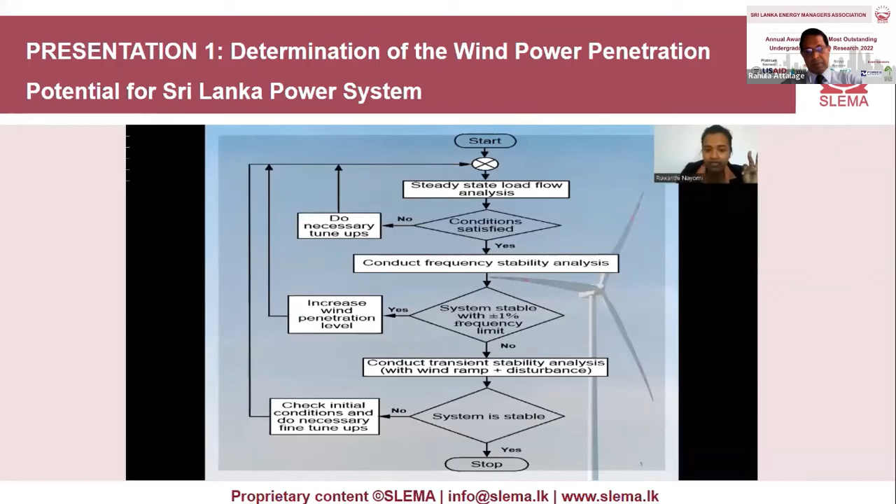And finally, establish wind power penetration potential for 2021 and 2025. This is my methodology. I have followed three analyses: load flow analysis, frequency stability analysis, and transient stability analysis. I have categorized my results in four parts. I will explain them one by one.

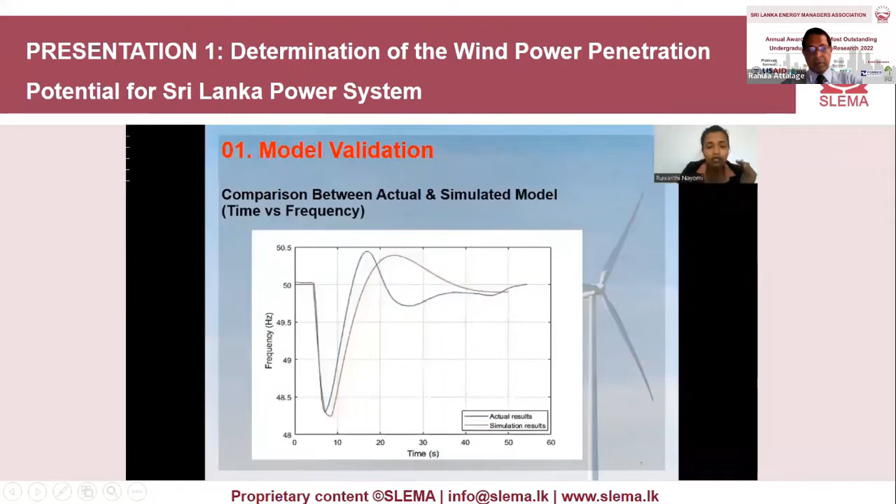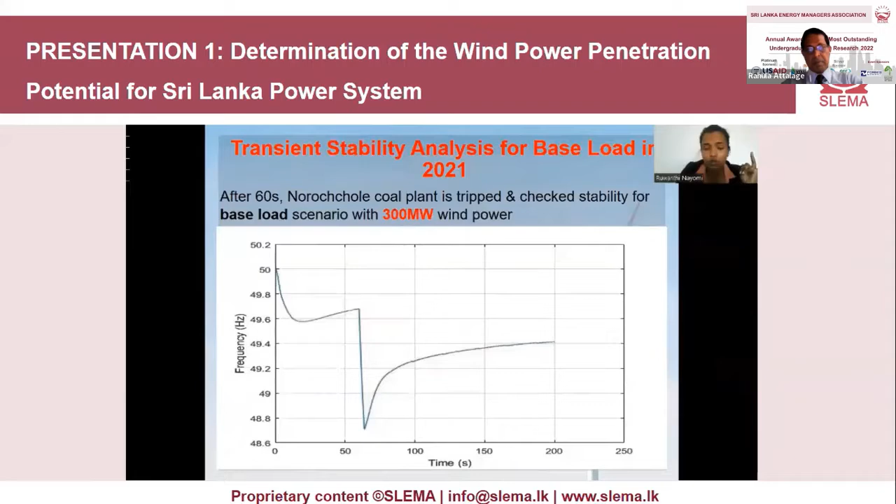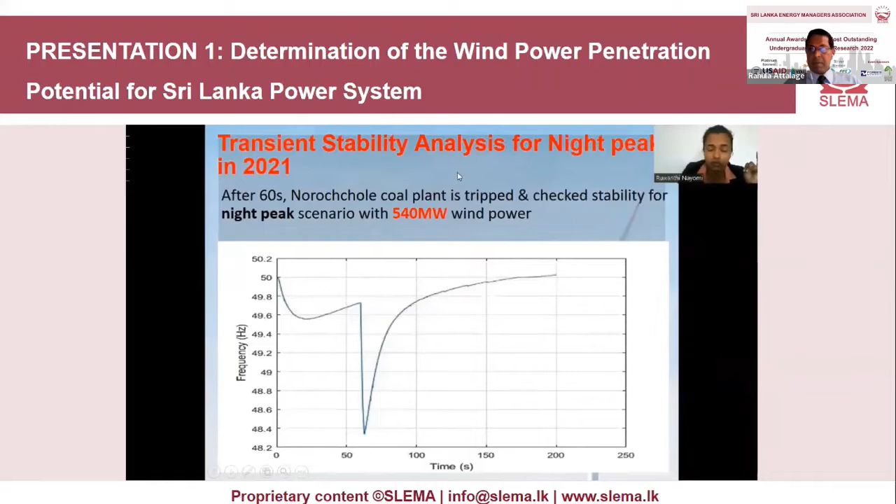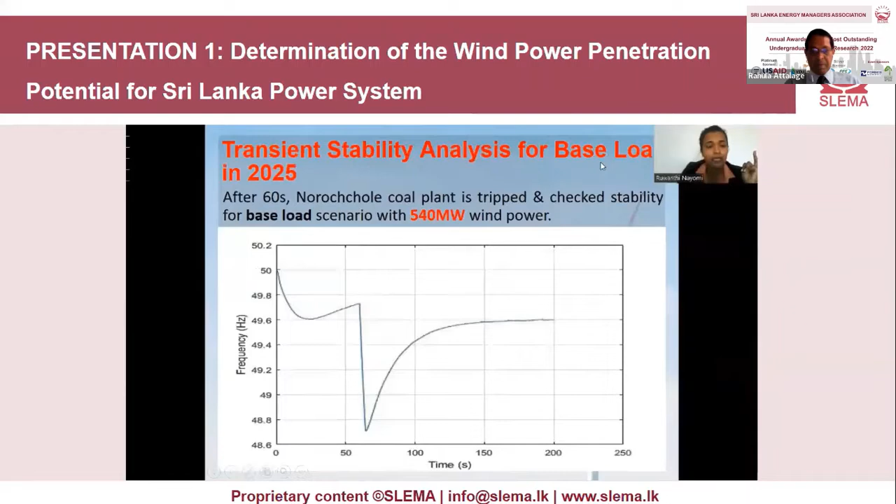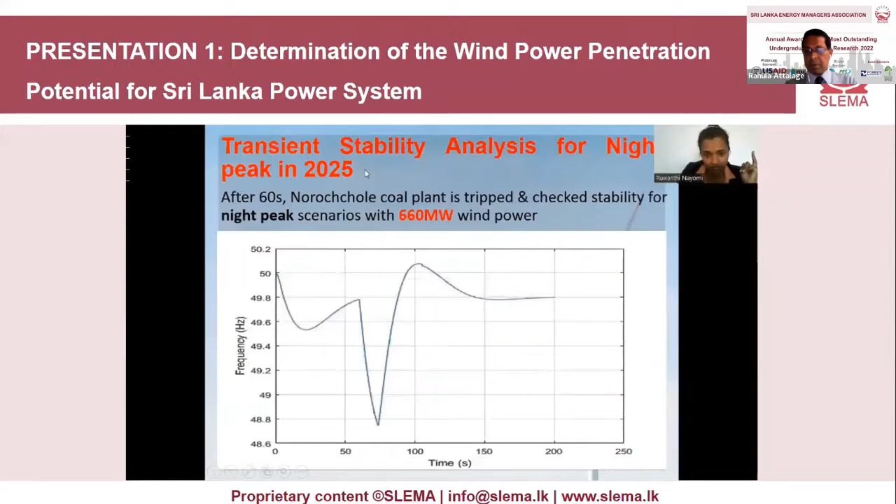Here, second column represents the wind absorption level as stated by Ceylon Electricity Board in long-term generation expansion planning. These are according to the CEB values. Last column represents the wind absorption level as stated by my research study. All the results are verified and confirmed by the transmission planning branch in Ceylon Electricity Board. So these results are 100% correct.

As an example, for 2021, CEB proposed wind level is 124 megawatt, but actually we can get 540 megawatt. See the difference, ladies and gentlemen. Now you can see the difference between the two values. So what's the meaning of this value? The meaning is we are wasting that much energy. We are wasting 416 megawatt of energy. Otherwise, we get this much energy from diesel or from coal.

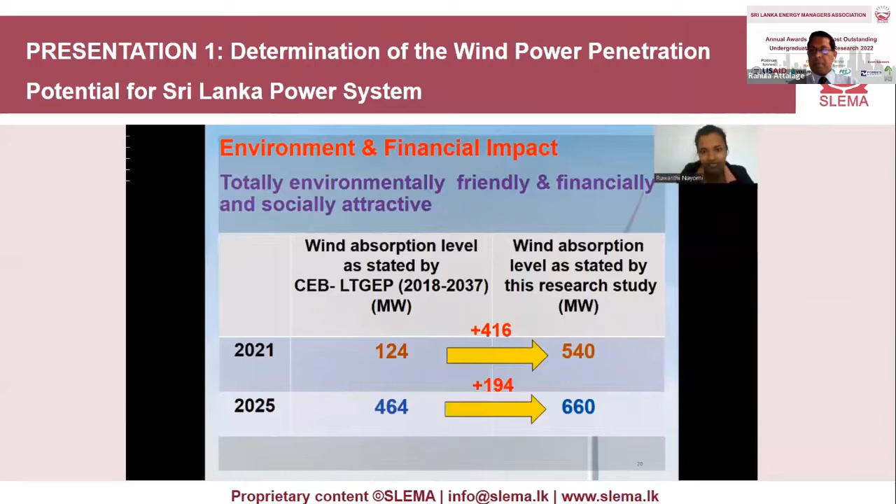So moving on to the device. We have introduced the Hull reservoir wave energy device, a floating type wave energy converter consisting of a flap and a hull moored to the seabed, and when the wave moves, due to the rocking motion, energy is generated.

This is a new hybrid concept. Sorry. This has been derived from a previous study, and there are modifications. We have replaced the pendulum with a flap, and we have also included the internal fluid in the hull.

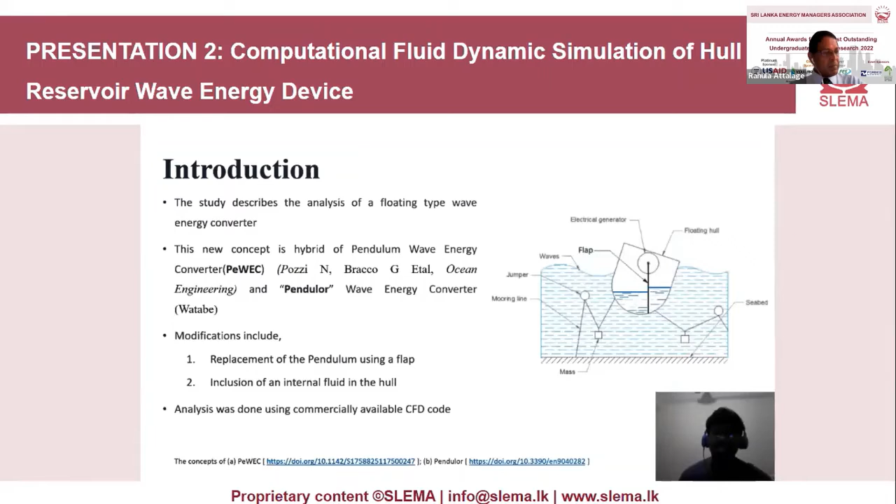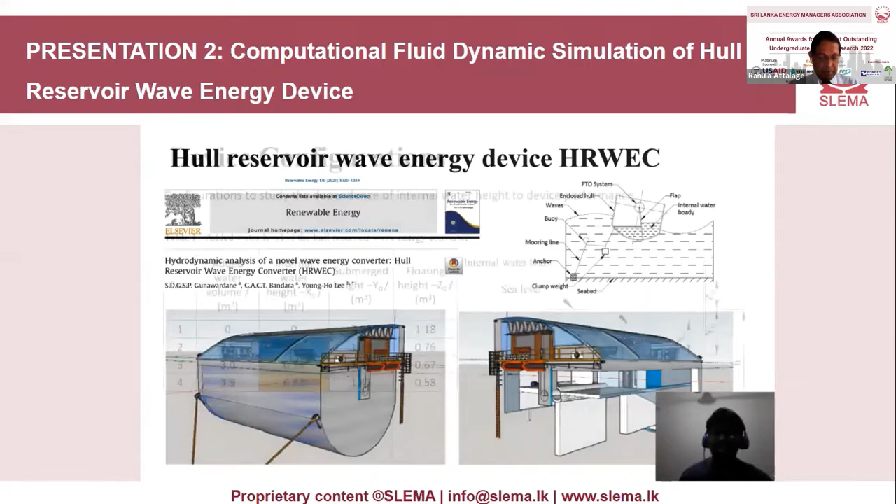The device was initially introduced in this research paper, and all the physics of this device have been discussed mainly in this paper, but in this paper the internal fluid of the hull hasn't been included. So we have studied this device under different configurations by changing the water level inside the hull. These are some arbitrary configurations that we came up with.

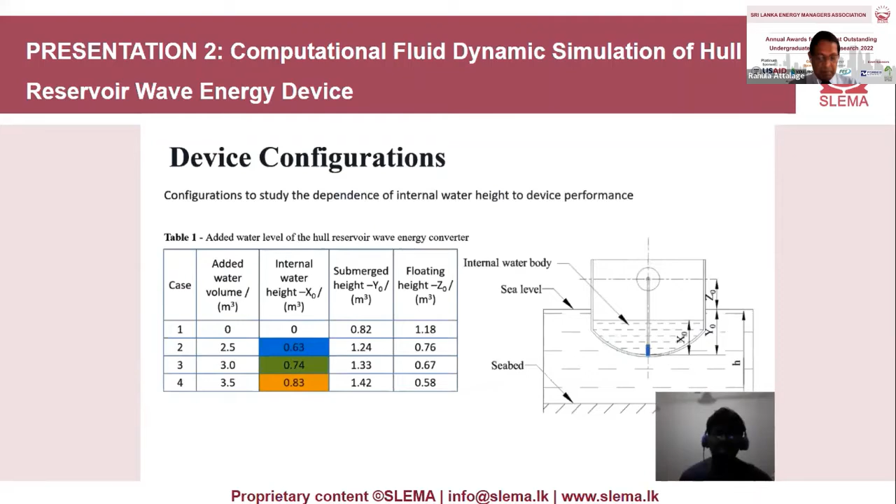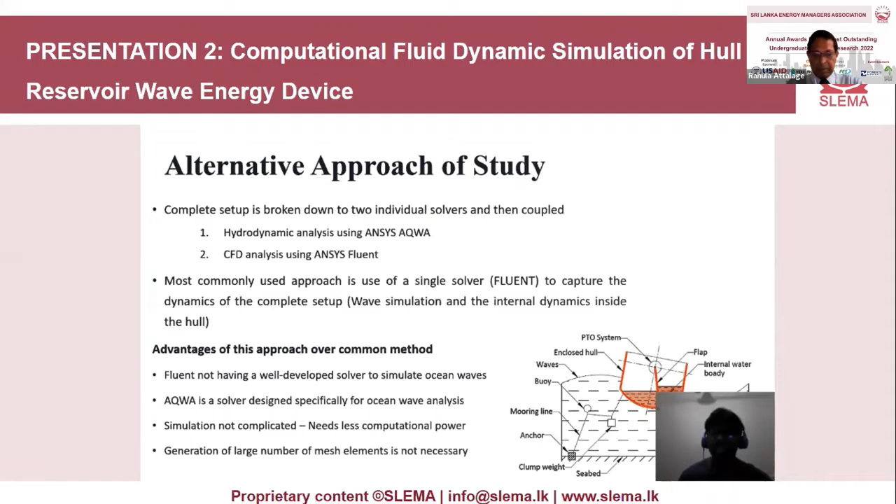Then, deviating from the conventional approach of study, rather than including this whole simulation in one complete simulation, we have divided this into 2 parts. The first part is where we have considered the hydrodynamic analysis using ANSYS Aqwa, and then the CFD analysis is done for the internal water dynamics as shown in red. There are several advantages of this approach as given below. This is the schematic diagram of the approach. This was done by using 2 softwares, ANSYS Aqwa and ANSYS Fluent.

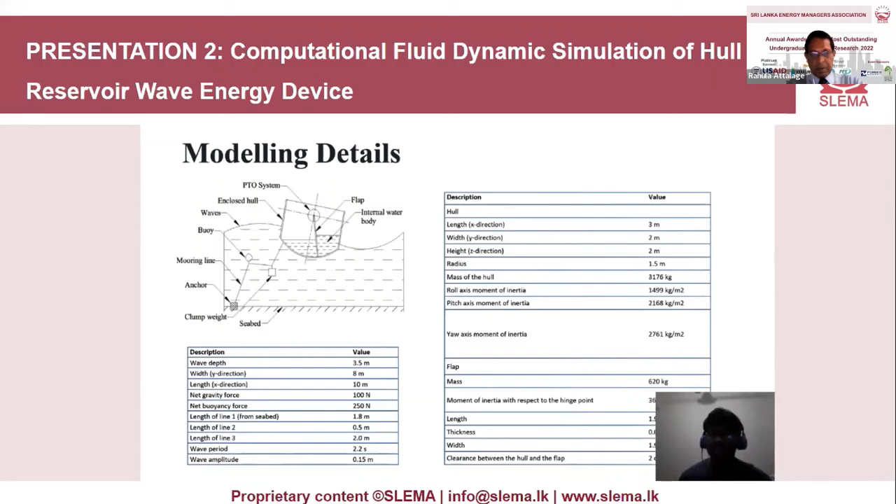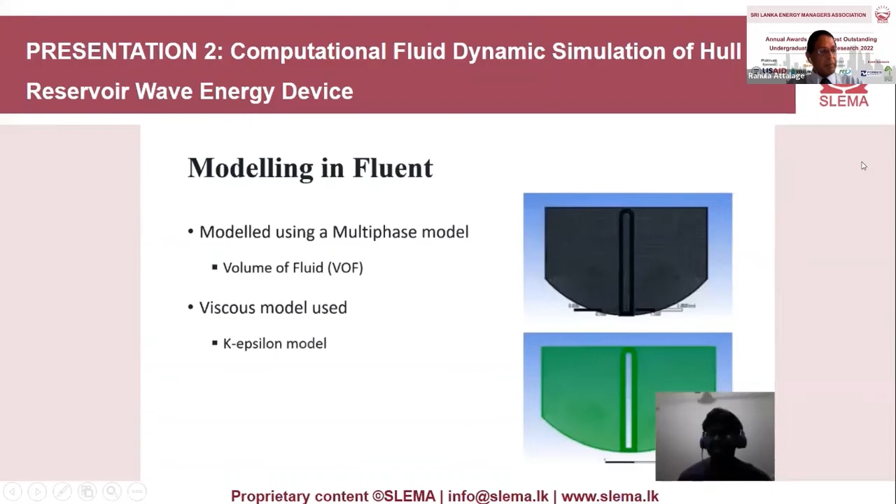These are the modeling details. Most of these modeling details are derived from the initial paper, and we have incorporated these details to suit our model. Modeling in Fluent was done using a multi-phase model. Because we have considered the internal dependence of the water level inside the hull, we have used the volume of fluid method to divide the phases into water and air, and also by studying the equations, we have used the K-epsilon viscosity model.

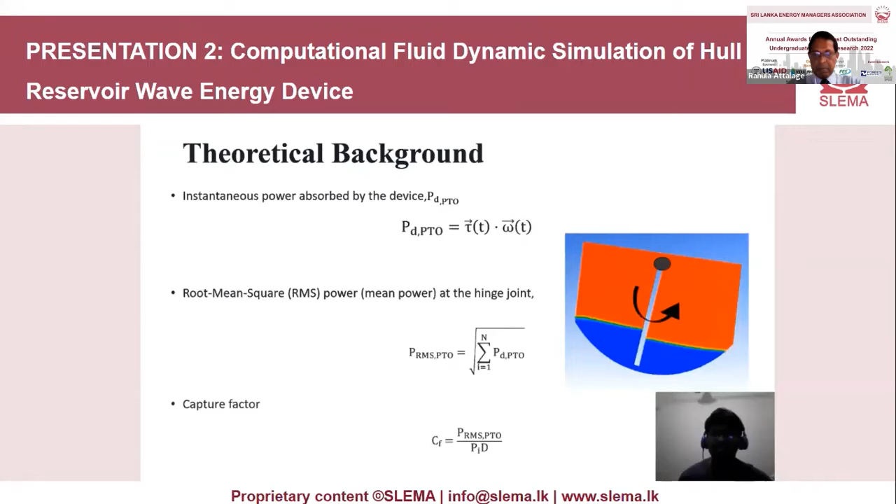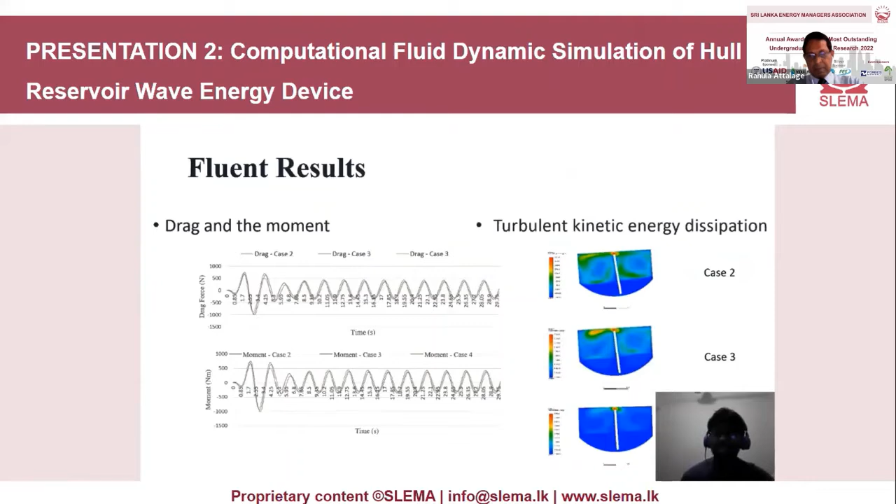This is the theoretical background to find the instantaneous power absorbed by the device, and also the root mean square power at the hinge joint. These are essential in calculating the efficiency. These are the Fluent results, and we were able to find the drag and the moment at the joint, and it showed the variations as this, and also the turbulent kinetic energy dissipation for the 4 cases was found like this. The first case is not shown in Fluent because there is no internal volume.

As we used a new approach, we initially did a validation of the method. We got the HRWEC and hull reservoir energy converter and simulated it in ANSYS Aqwa, and we used those results to compare with the reference pendulum wave energy converter, and we obtained a similar comparison suggesting that our approach was correct.

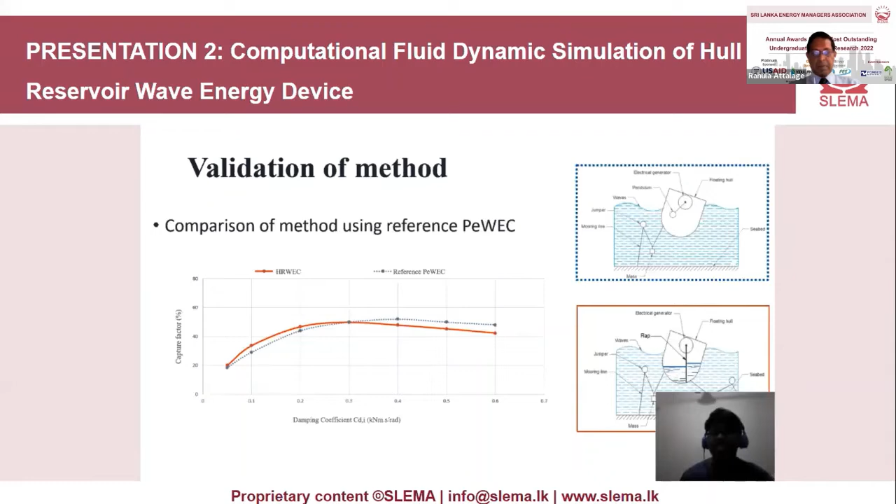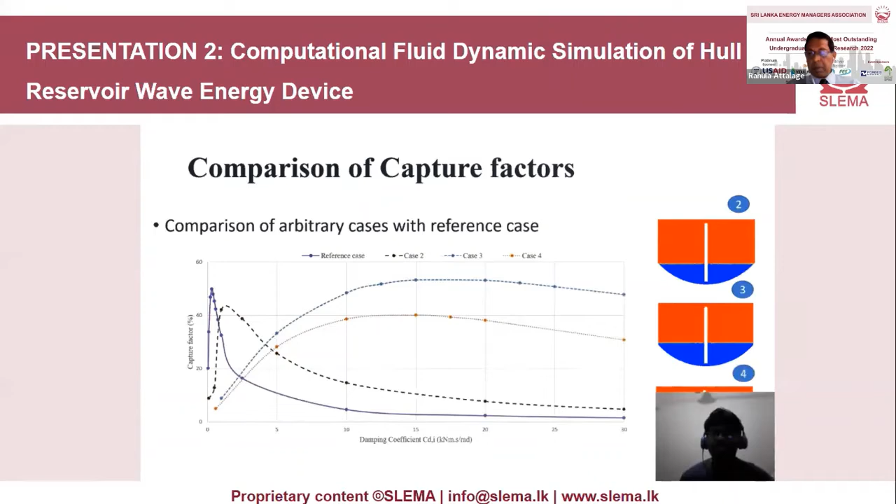And the capture factors were compared for the 4 cases. As you can see, for case 3, where 0.74 internal water height was used, there was a large capture factor producing a large amount of energy, and also you can see that this high capture factor area was spread over a large range of damping coefficients, but in the initial 2 cases they were obtained for only a small range of damping coefficients.

So the conclusions were that the chosen method was approved as an appropriate method for analysis, and also the drag forces in the device tend to increase with wetted surface while moments show contrasting behavior. According to the turbulent energy dissipation graphs, we noted that the dissipation decreases with the wetted surface, and the internal water height of 0.74 meters, which was case 3, produced the highest capture factor, which was the highest efficiency. These are the main conclusions that we were able to come across.

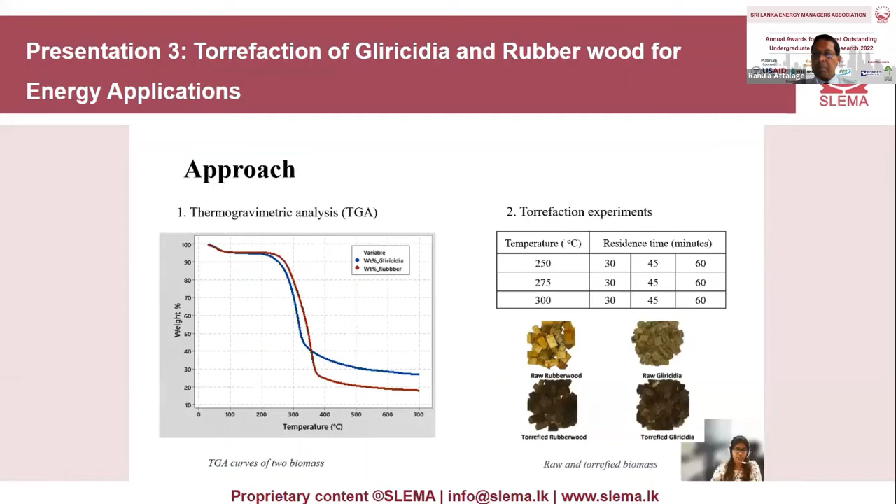Pressure was maintained at atmospheric pressure while continuously feeding nitrogen gas to maintain an inert atmosphere and a constant temperature. The heating rate was maintained at 10 degrees Celsius per minute by a temperature controlling system. For biomass characterization, we conducted proximate analysis of torrefied biomass with standard test methods. And we conducted an ultimate analysis to calculate the elemental composition. The calorific value of torrefied biomass was determined accordingly. Furthermore, we performed FTIR analysis to identify the functional groups associated with the torrefaction process.

After obtaining the proximate and ultimate analysis results, we calculated the energy yield and the energy mass co-benefit index. The key findings of our research are as follows. Based on our results, we observed a reduction in mass yield, volatile matter, moisture content, oxygen and hydrogen percentage with the increase of torrefaction severity, while an increment was observed in fixed carbon, ash content, carbon percentage and higher heating values. On average, a mass loss of 12% for rubber wood and 18% mass loss for gliricidia was observed.

It can be concluded that the higher residence time and higher temperature results in better energy mass co-benefit. We hope our research findings will benefit the whole society, and in essence, torrefied biomass can be used as a co-firing agent in coal power plants, resulting in emission reduction and environmental and economic feasibility. With improved combustion processes, industries with biomass boilers and furnaces can also benefit from torrefied biomass.